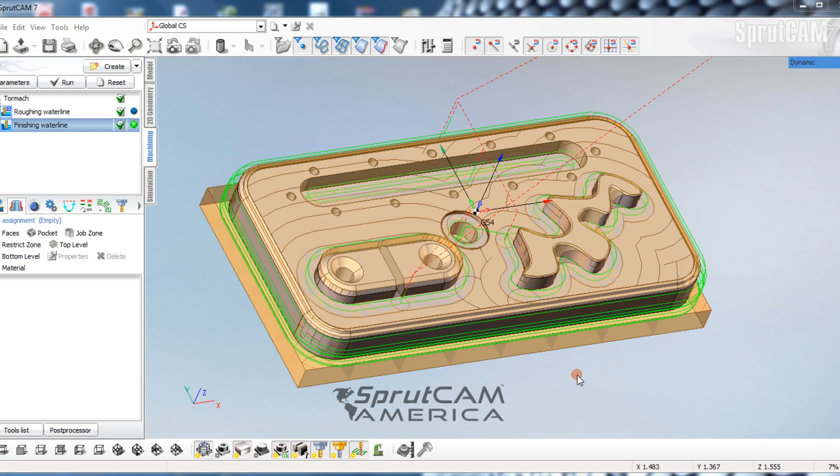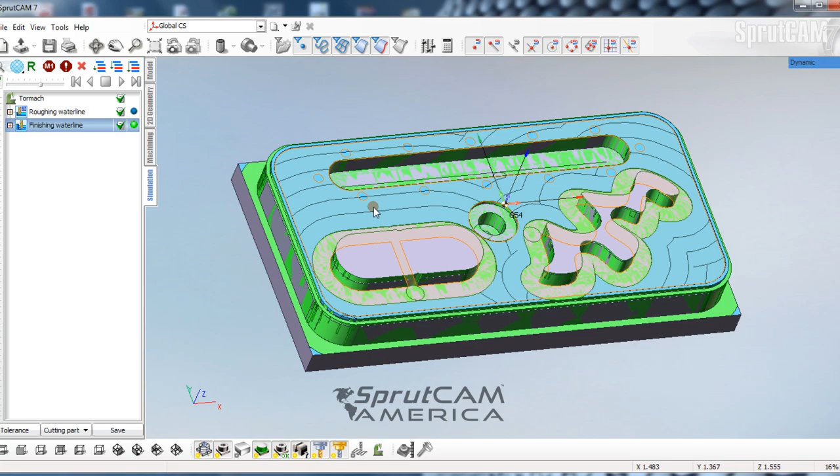In this tutorial, we are going to follow up on beginning tutorial number 6 with Flat land finishing to finish off the top of this part. And we can look in our simulation results from number 6, and we can see there still is quite a bit of finishing that needs to go on here. So we are going to finish it with Flat land finishing.

So we will go and create Finishing, Flat land finishing, and just as roughing and finishing waterline, we don't actually have to pick any surfaces for this particular operation as well. It's going to finish everything that is essentially flat in here. So we're going to double click Flat land finishing.

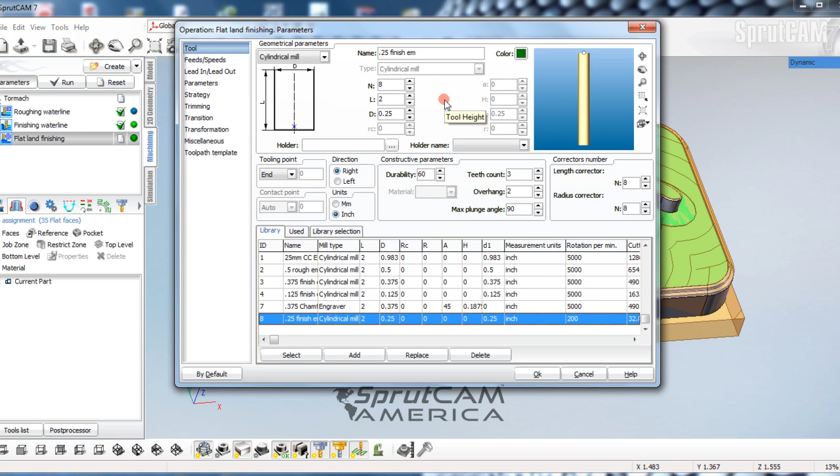We're going to our tool assignment, and we're going to have to continue with our 1/4 inch finish end mill so I can get into all the little nooks and crannies, so to speak. And we will go feeds and speeds, which on our last finishing operation we had at 5,045, and I liked it so much we'll do it again. And we look at lead in, lead out. We'll do a safe level of 0.05.

Now I'll explain that a little bit. A safe level is the distance that the cutter is going to come down to at a rapid pace, and when it reaches 50 thousandths, then it will engage the feed rate that you have set, and it'll start moving the cutter at a set feed rate.

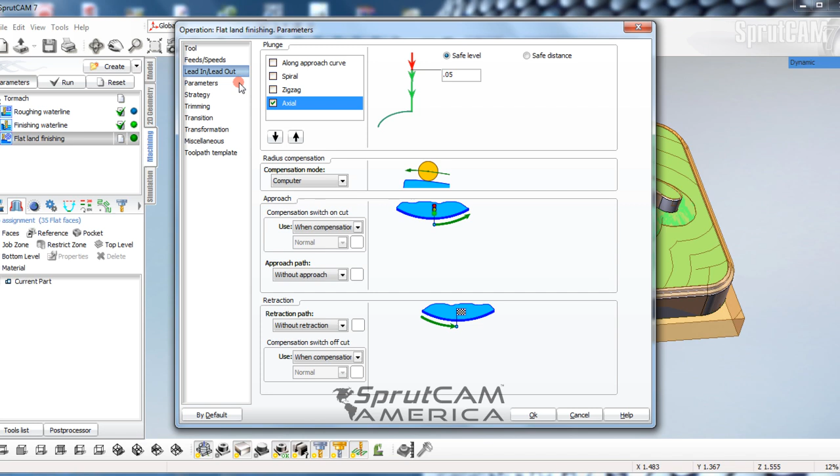Now we'll go to parameters, and you'll see safe plane up here, which it's fine if it's 0.34. You can make it pretty much whatever you want, but what you want to make it is above the safe level. And what safe plane does is if the cutter needs to make a transition from one side of the part to the other, that is the height at which it will retract to before it moves. So you want to make sure safe plane is higher than any kind of clamps or anything you may have in the way.

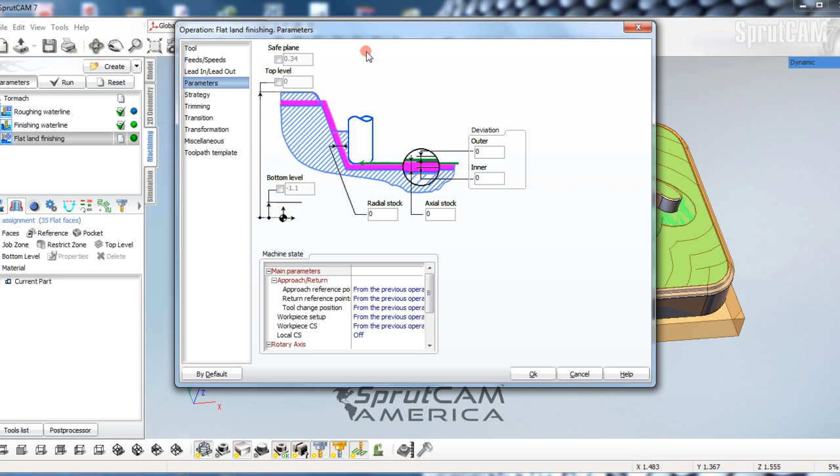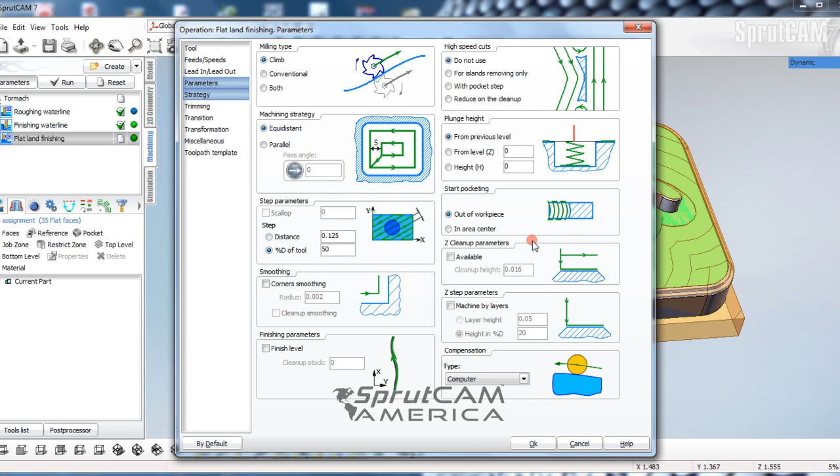Now we're going to go to bottom level. Well, we're just going to actually uncheck bottom level. We don't really need to mess with any of these parameters at this point. Oops, outer deviation always catches me. Go to strategy. We're going to want to climb mill everything. I don't think we're going to have to really set any heights or anything real special, because we've only pretty much allowed 10 thousandths of extra stock, so we should be okay. So we'll click OK on that. And now we're just going to click Run.

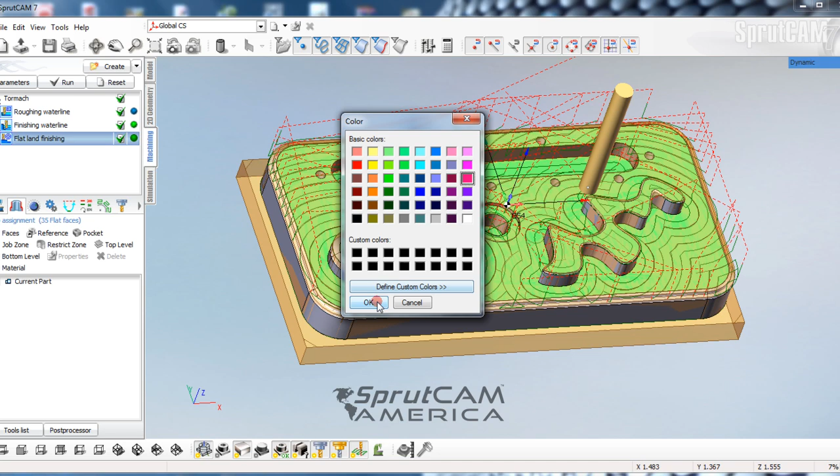We have some pretty good looking tool paths there. Let's click on this color and make it something bright and something much different than green. We'll go to our simulation and we'll click Run. And you can see the cutter's going around cleaning up all the flat surfaces that the 2 prior operations have missed.

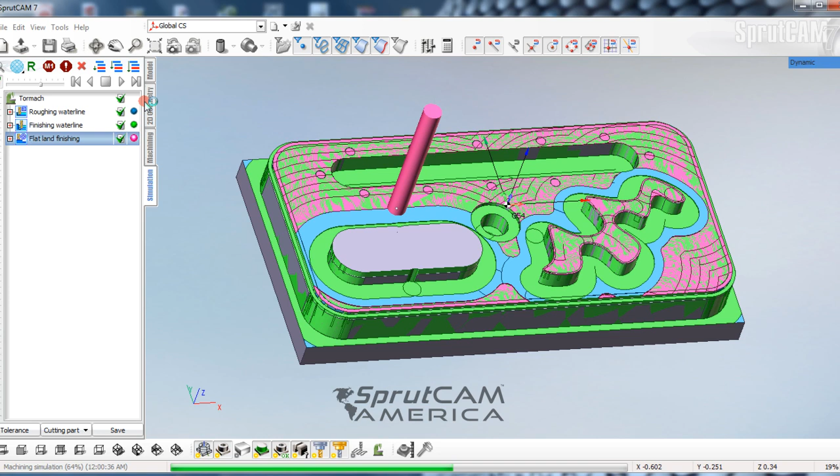And you'll see it jumping around a lot. As I stated in tutorial 5, some of these operations may not be the most economic, but they're fairly easy to set up. So we'll just see what they have to offer here. It's going through and cleaning off all the flats. There it is. It looks pretty good.

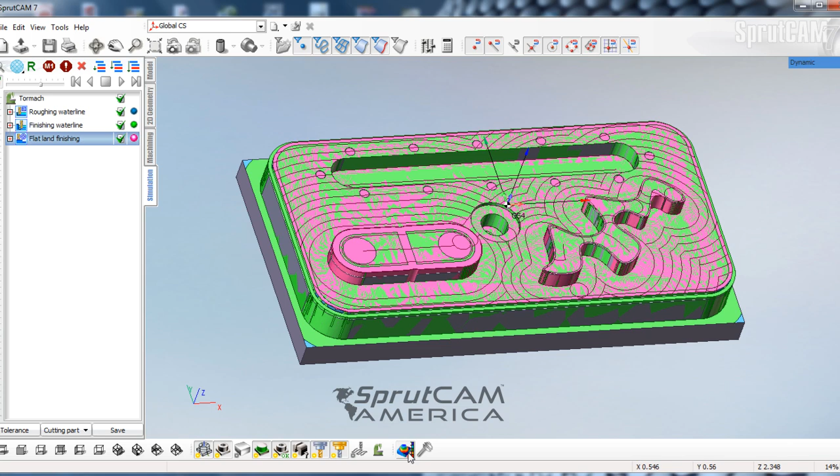Let's do our machining result with part compare. Now you can see our part compare. Everything looks good except for right here where you can see a whole bunch of extra blue material in here. That 1/4" cutter couldn't get any deeper in there, so in a later tutorial we'll have to cover how to get at that little section and clean it up. So that'll be probably in another couple of tutorials down the road.

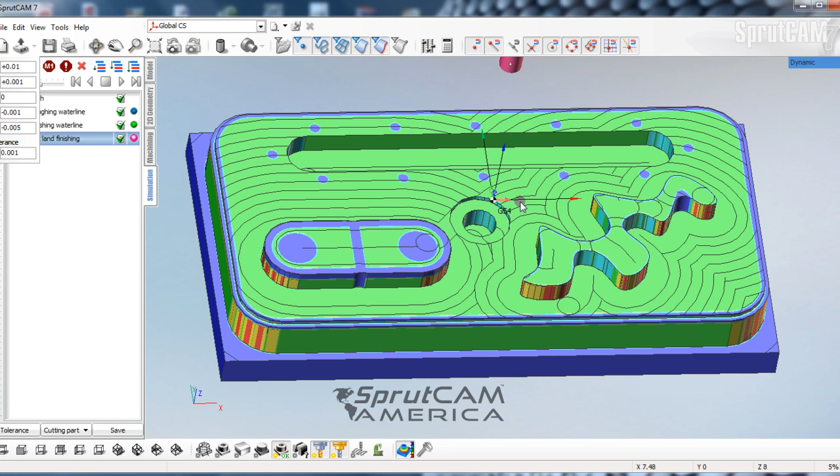So this has been beginning tutorial number 7 on Flat land finishing, and come again for tutorial 8 where we're going to drill some holes.